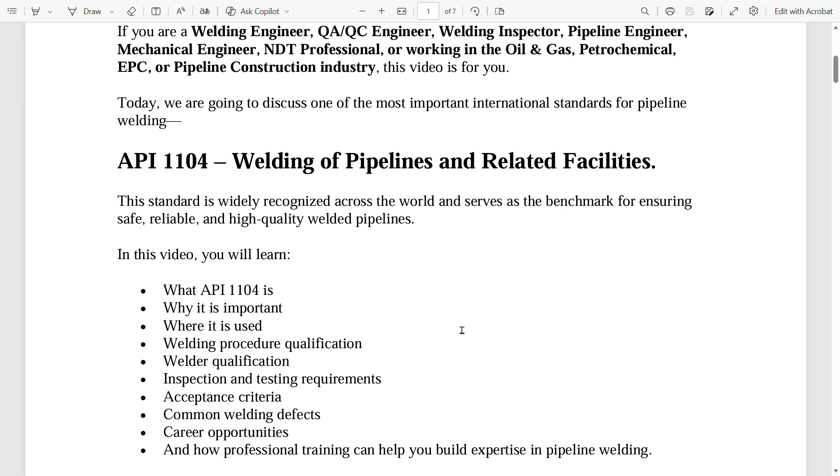In this video, we will learn what API 1104 is, why it is important, where it is used, welding procedure qualification, welder qualification, inspection and testing requirements, acceptance criteria, common welding defects, career opportunities, and how professional training can help you build expertise in pipeline welding.

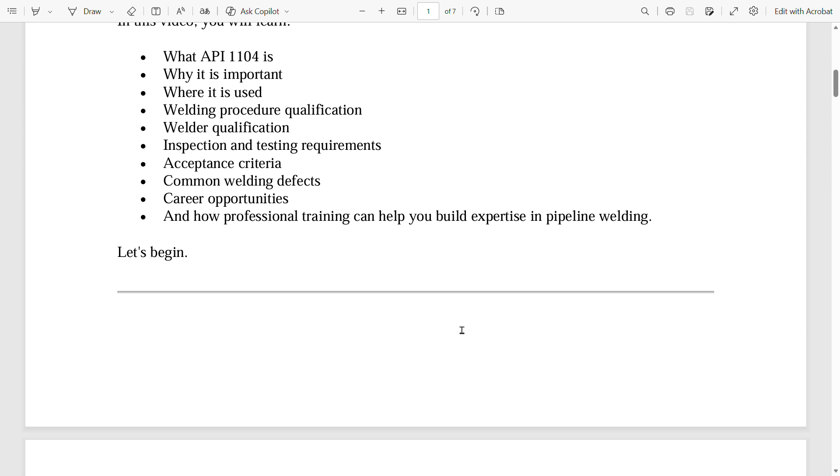Let us begin. What is API 1104?

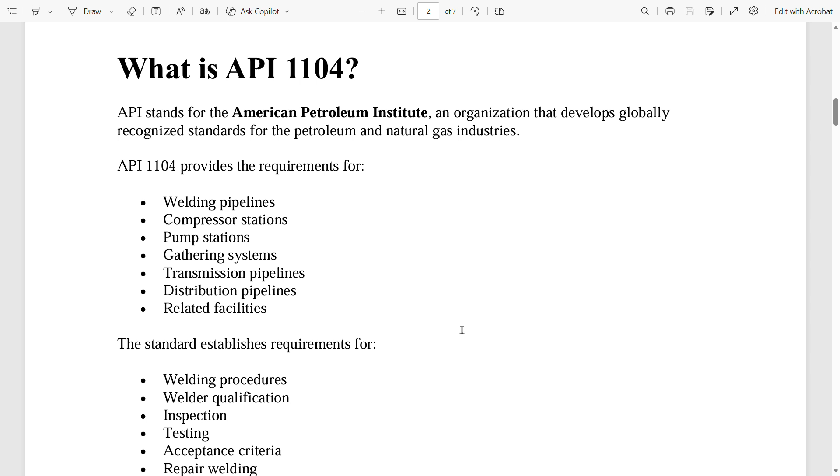API stands for the American Petroleum Institute, an organization that develops globally recognized standards for the petroleum and natural gas industries. API 1104 provides the requirements for welding pipelines, compressor stations, pump stations, gathering systems, transmission pipelines, distribution pipelines, and related facilities.

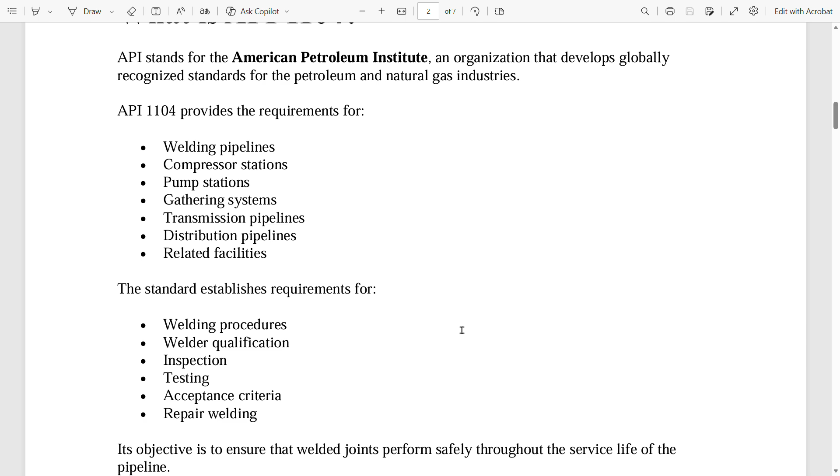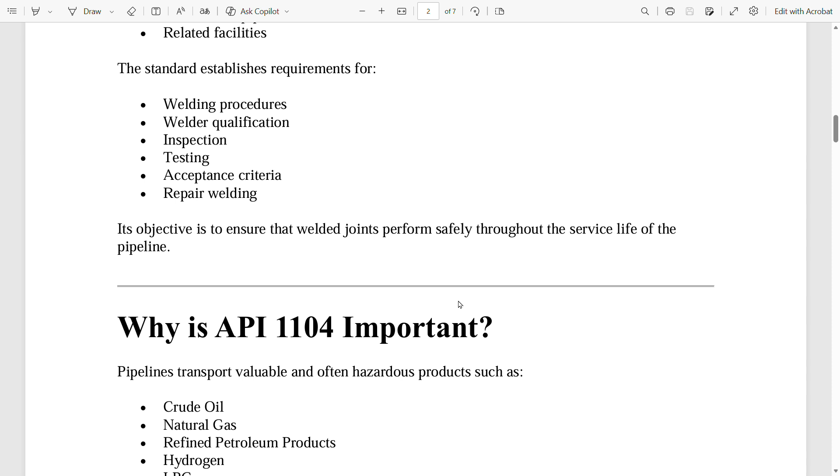The standard establishes requirements for welding procedures, welder qualification, inspection, testing, acceptance criteria, and repair welding. Its objective is to ensure that welded joints perform safely throughout the service life of the pipeline.

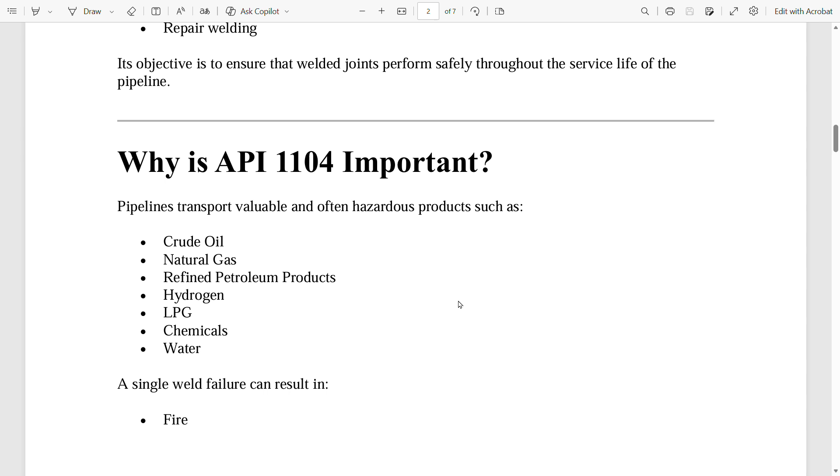Why is API 1104 important? Pipelines transport valuable and often hazardous products such as crude oil, natural gas, refined petroleum products, hydrogen, LPG, chemicals, and water.

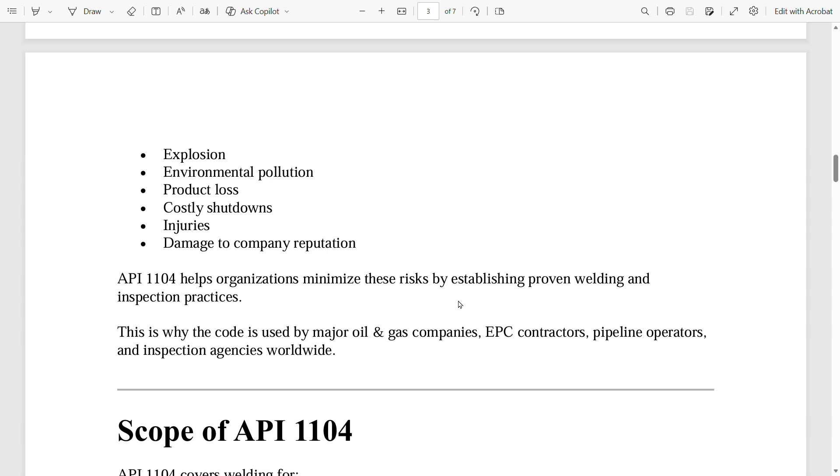A single weld failure can result in fire, explosion, environmental pollution, product loss, costly shutdowns, injuries, and damage to company reputation. API 1104 helps organizations minimize these risks by establishing proven welding and inspection practices.

This is why the code is used by major oil and gas companies, EPC contractors, pipeline operators, and inspection agencies worldwide.

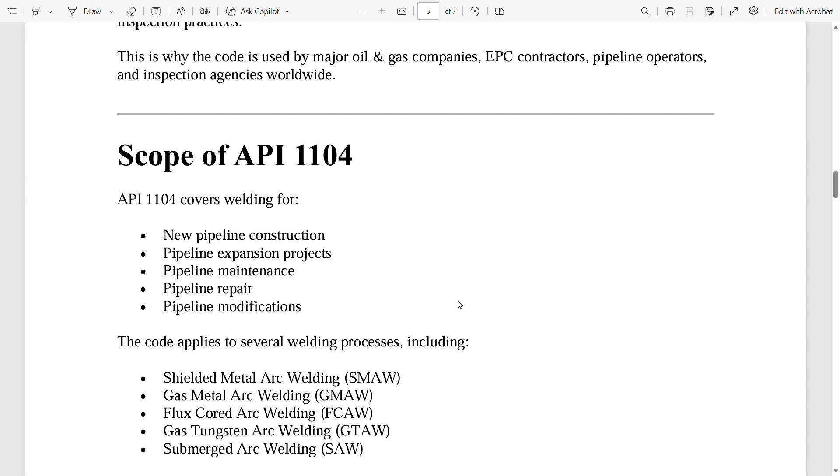Now, scope of API 1104. It covers welding for new pipeline construction, pipeline expansion projects, pipeline maintenance, pipeline repair, and pipeline modification.

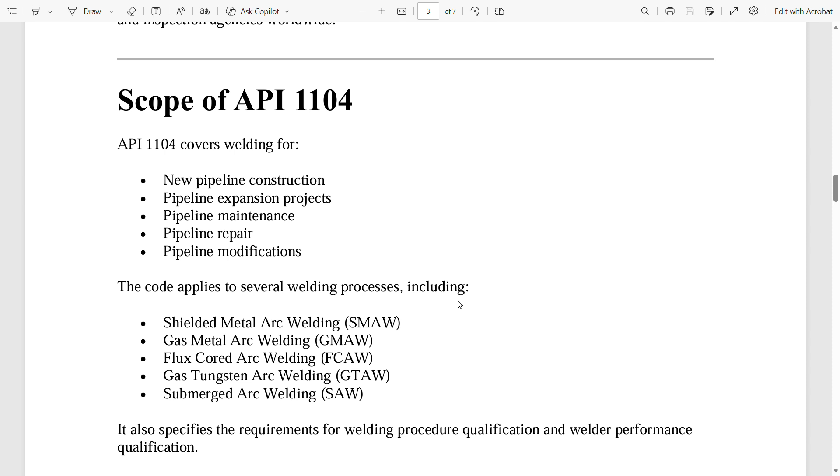The code applies to several welding processes including shielded metal arc welding (SMAW), gas metal arc welding (GMAW), flux core arc welding (FCAW), gas tungsten arc welding (GTAW), and submerged arc welding (SAW).

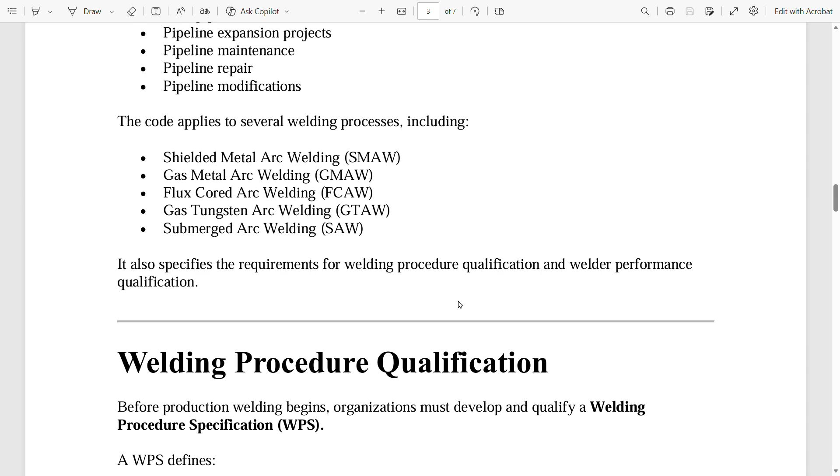It also specifies the requirements for welding procedure qualification and welder performance qualification. Before production welding begins, organizations must develop and qualify a welding procedure specification, WPS.

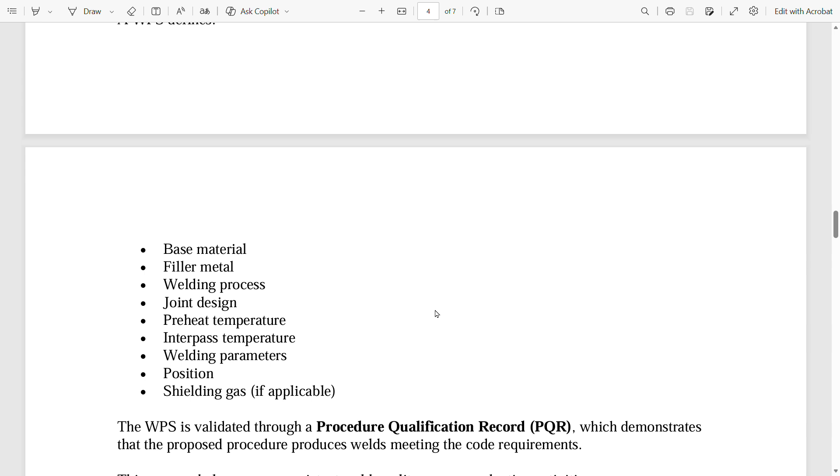A WPS defines base material, filler metal, welding process, joint design, preheat temperature, interpass temperature, welding parameters, position, and shielding gas, if applicable.

The WPS is validated through a procedure qualification record, PQR, which demonstrates that the proposed procedure produces welds meeting the code requirements. This process helps ensure consistent weld quality across production activities.

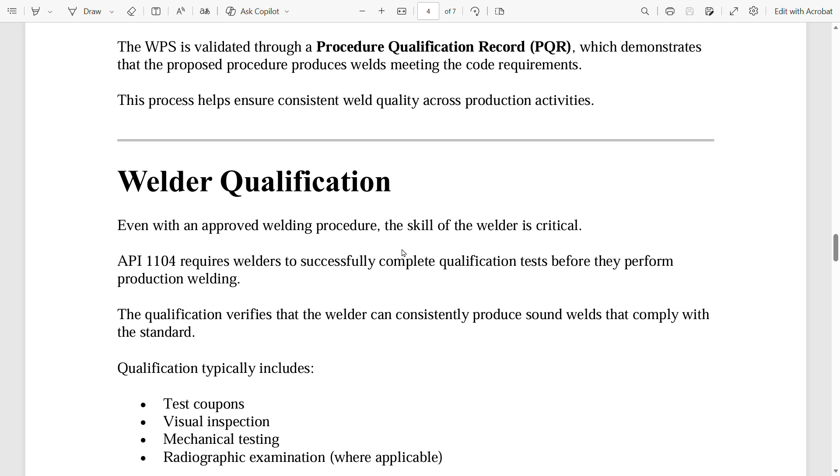Now, welder qualification. Even with an approved welding procedure, the skill of the welder is critical. API 1104 requires welders to successfully complete qualification tests before they perform production welding.

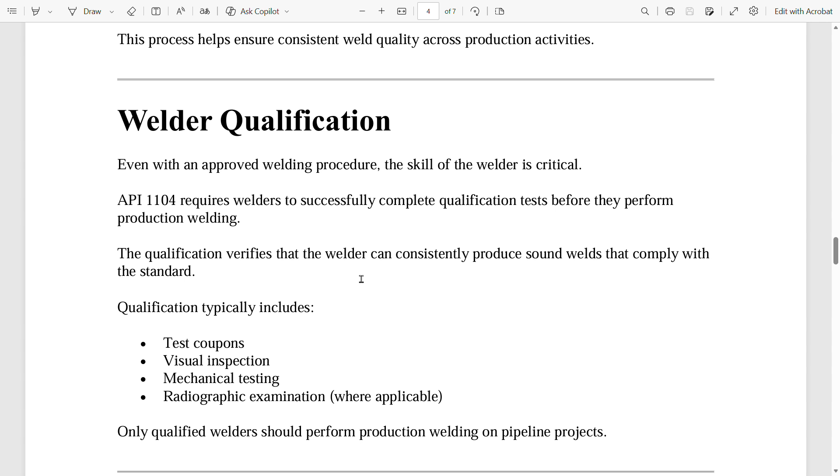The qualification verifies that the welder can consistently produce sound welds that comply with the standard. Qualification typically includes test coupons, visual inspection, mechanical testing, and radiographic examination, where applicable. Only qualified welders should perform production welding on pipeline projects.

Inspection requirements. Inspection is a key part of quality assurance. API 1104 includes requirements for inspection before, during, and after welding.

Inspectors verify joint preparation, fit up, welding consumables, welding parameters, weld profile, reinforcement, alignment, and final weld appearance.

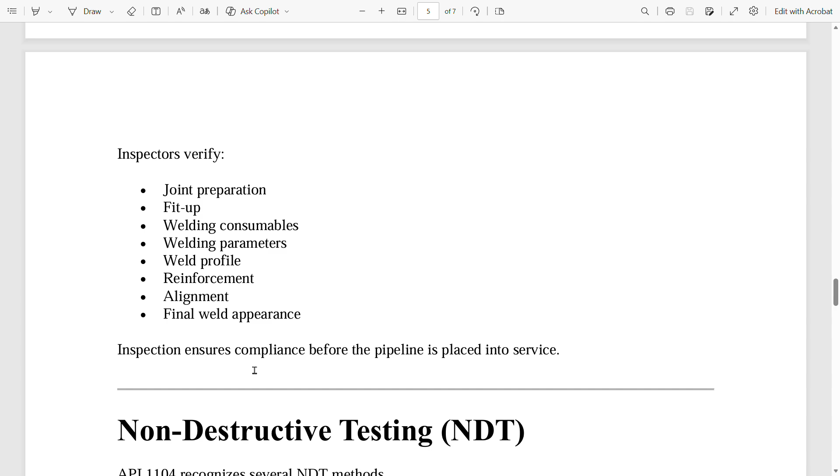Inspection ensures compliance before the pipeline is placed into service. Non-destructive testing (NDT): API 1104 recognizes several NDT methods.

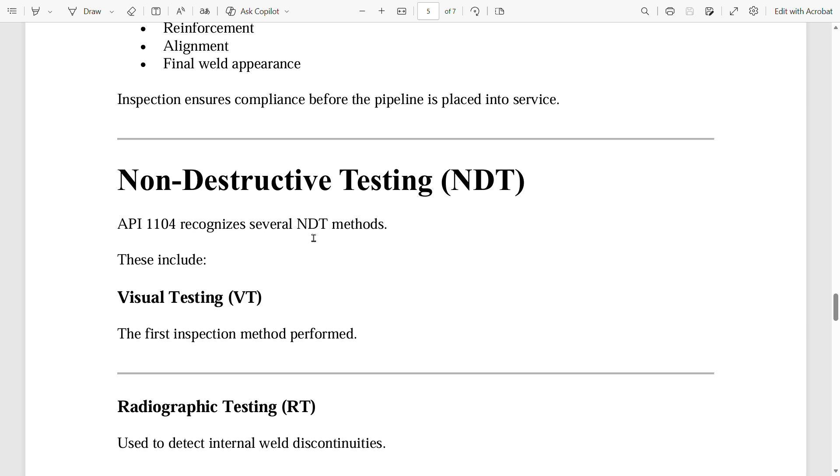These include visual testing (VT), the first inspection method performed, and radiographic testing (RT), used to detect internal weld discontinuities.

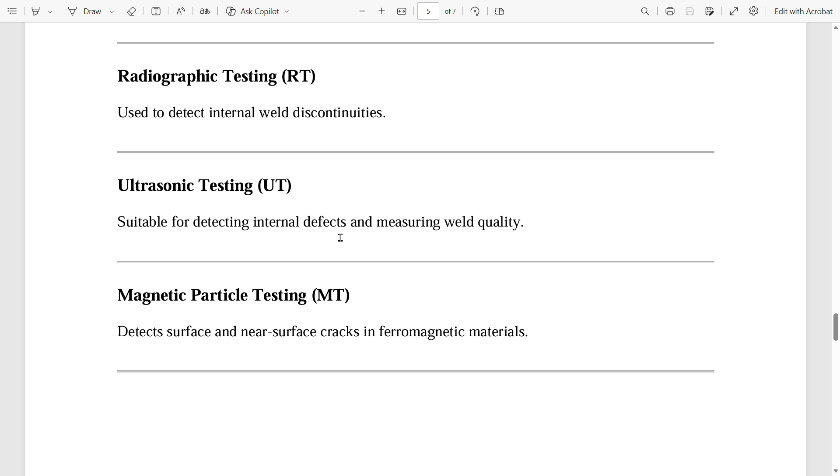Ultrasonic testing (UT) is suitable for detecting internal defects and measuring weld quality.

Magnetic particle testing (MT) detects surface and near-surface cracks in ferromagnetic materials, while liquid penetrant testing (PT) is used for detecting surface breaking defects in non-magnetic materials.

Selection of the NDT method depends on project specifications and applicable code requirements. Acceptance criteria and welding defects: API 1104 defines acceptance criteria for welded joints.

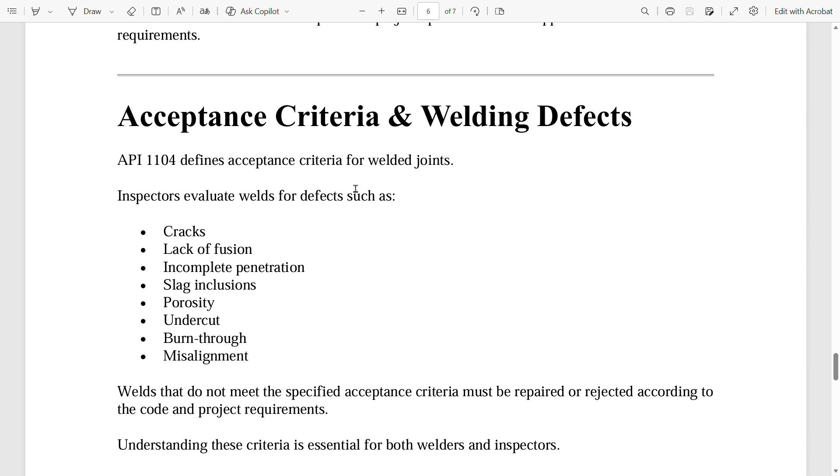Inspectors evaluate welds for defects such as cracks, lack of fusion, incomplete penetration, slag inclusions, porosity, undercut, burn through, and misalignment. Welds that do not meet the specified acceptance criteria must be repaired or rejected according to the code and project requirements.

Understanding these criteria is essential for both welders and inspectors. Now, career opportunities, and conclusion at last.

Knowledge of API 1104 is highly valued in industries such as oil and gas, pipeline construction, petrochemicals, refineries, LNG facilities, cross-country pipeline projects, EPC companies, and inspection and certification bodies.

Professionals with API 1104 expertise can pursue roles such as welding engineer, welding inspector, QA/QC engineer, pipeline engineer, NDT inspector, quality manager, construction engineer, and third-party inspection engineer.

As pipeline infrastructure continues to expand worldwide, organizations increasingly seek professionals who understand internationally recognized welding standards and inspection practices.